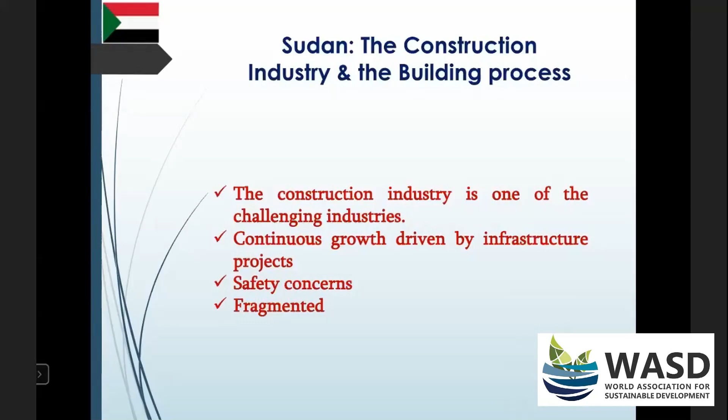Right, the construction industry in Sudan, as in many developing countries, suffers from a multitude of challenges. These challenges confront the development and the performance improvement of the industry. And the problems related to construction and building materials, their production, their supply, and their management, tend to dominate the list of impediments towards the industry improvement.

So the building construction process basically involves the usage of several materials. Some of them are natural, others are man-made. And because of the appearance of new trends in building architectural and structural designs, more man-made materials came into the scene with more sophisticated properties to match the client's requirements for more durable, cheaper, and ecologically friendly options.

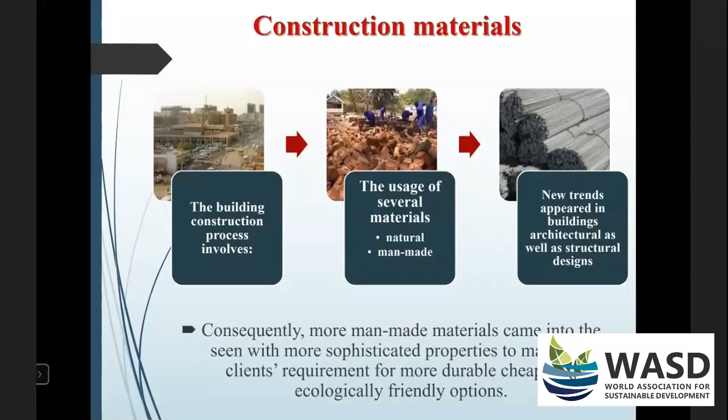Concrete is the most widely used man-made structural material. It's a composite material mainly containing aggregates in their two different forms, the fine and coarse aggregate, as well as cement and water added in different proportions, and sometimes we add some admixtures for certain properties. However, concrete is criticized for being an environmentally unfriendly material.

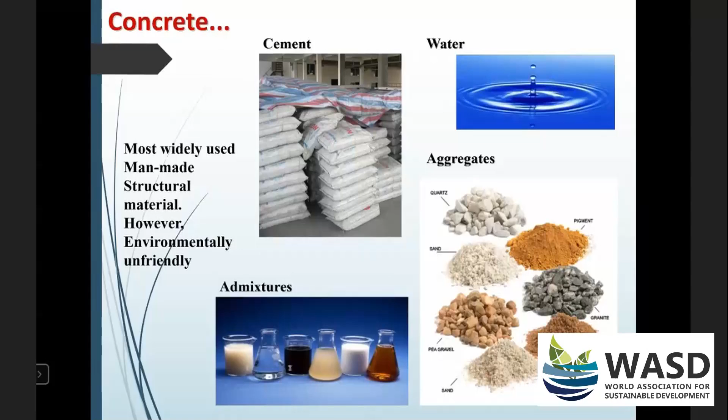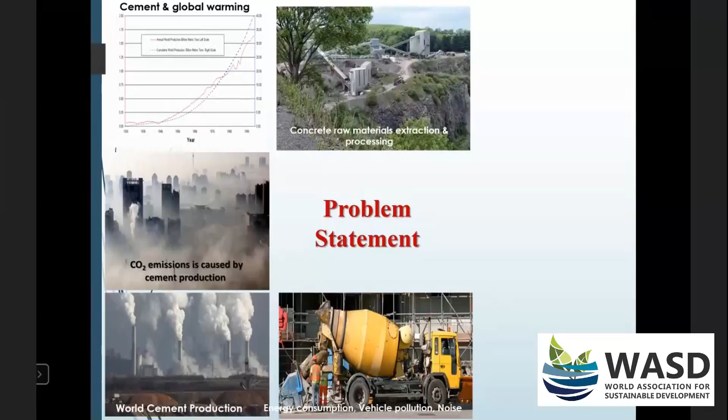The production of concrete involves the use of cement, and cement production is one of the main sources of carbon dioxide emission. The production of cement involves depletion of natural resources during the raw materials extraction and processing. And concrete transportation consumes energy and poses some pollution to the environment as well. So the impact of concrete production on the whole environment is that it destroys the natural infrastructure without replacing the ecological functions that humanity depends on.

So our aim concerning this part of our research is to find environmentally friendly materials, to look for more comparable options, something that is sustainable, but at the same time could do the same job that the components of the concrete mix can do. So we basically were thinking to go green.

Our objectives are as follows. We wanted to explore the availability of kaolinite clays as a naturally occurring mineral in Sudan, and we wanted to prepare metakaolin, which is a thermally treated form of the kaolinite clay. And we wanted to determine the chemical composition of this metakaolin and to assess its pozzolanic reactivity, because we're going to use it as a replacement for cement in different types of concrete mixtures, so that we can determine whether it's a suitable material or not.

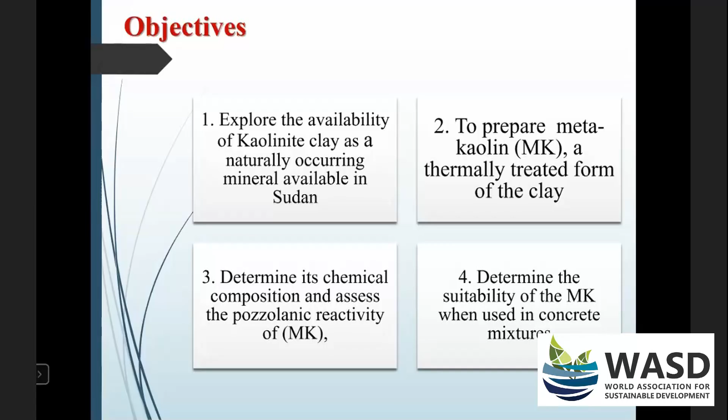So the methodology that we basically adopted was as follows. The kaolinite clay was collected from 4 different locations in Sudan for this study. After that, we transformed the kaolin clay to metakaolin through a calcination process. Then we checked the chemical composition to determine the major oxides available in this material, and compared that to ordinary Portland cement. As well, we wanted to determine the degree of pozzolanicity for this new material before using it in different ways in concrete mixtures.

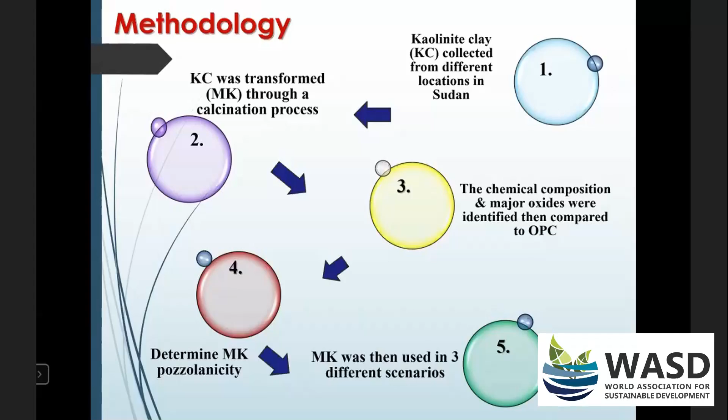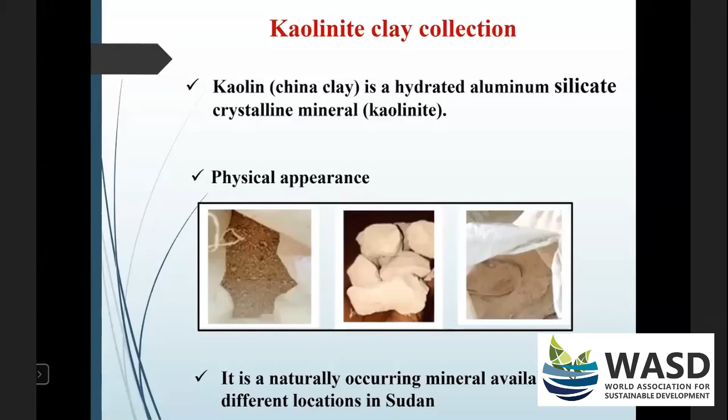As for the kaolinite clay collection, kaolin, which is the China clay, is a hydrated aluminum silicate crystalline mineral, which is referred to as kaolinite. In physical appearance, when we collected these samples from the field, sometimes it's a powder, other times it comes in larger pieces, whitish in color in some places, and in other places brownish, light brown, or maybe yellowish or grayish. All in all, it does not dissolve in water, but when it gets wet, it gets darker in color, and it gets an earthy smell.

Chemically, the kaolinite clays are structured around a series of alternating buckled silicate and aluminate layers, with the silicon in 4 coordination and the aluminum in a mixture of 5, 4, or 6 coordination.

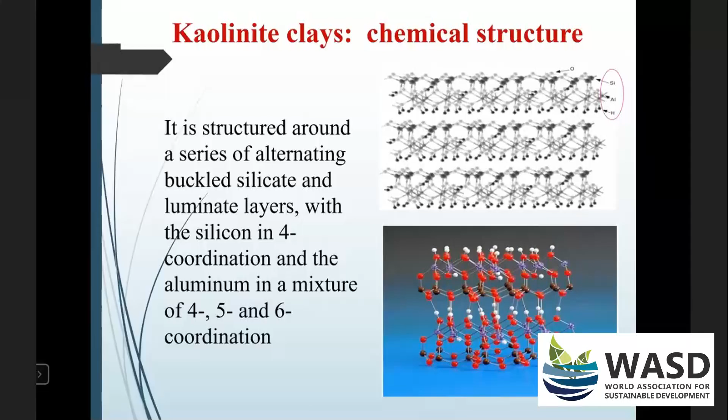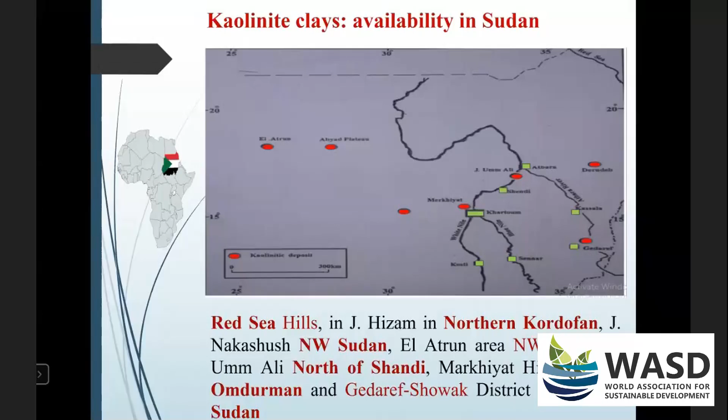In Sudan, it was found out that kaolinite clay is available in many different areas, extending all over the country. We've got samples of kaolinite clays in the Red Sea Hills in the northern Sudan. We've got some in northern Kordofan in the western part of Sudan. We've got some in the northern parts of Sudan, in Shendi, we've got in Gedaref, Showak, even in the central parts of Sudan. So it's available in many locations in Sudan.

The process of getting the metakaolin, which is the material that we are going to incorporate in our concrete mixtures, we had to treat the kaolinite clay in a thermal way. So it's a very simple and basic process where the mineral kaolinite was heated. Upon heating, this process drives the water out and collapses the material structure. The ending result is an amorphous aluminosilicate, which is the metakaolin that we are trying to use in our concrete mixtures.

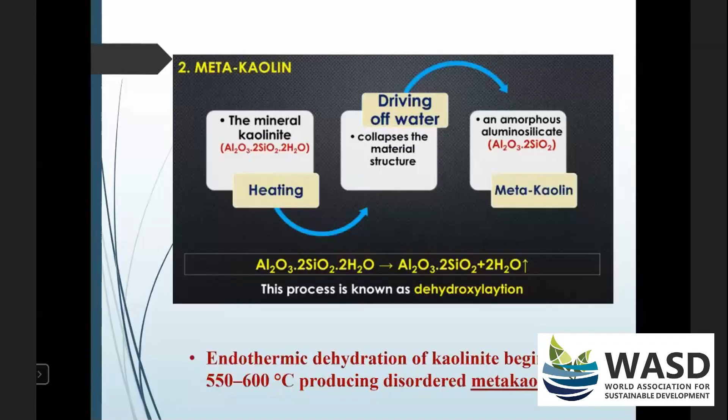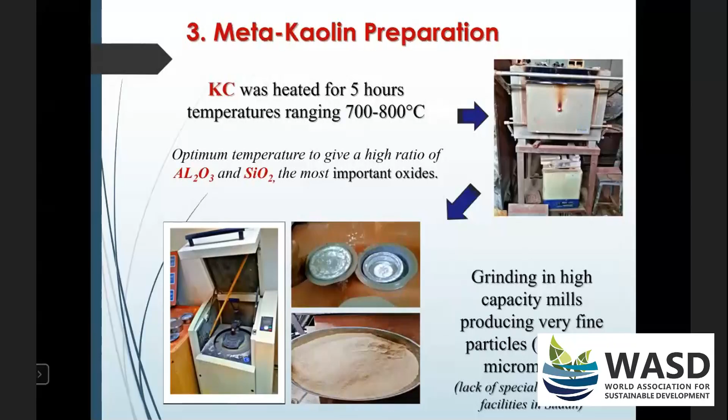For us in the lab, the kaolinite clays were heated for 5 hours in temperatures ranging from 700 to 800 degrees Celsius in a very simple furnace in the lab. And after that, the process was followed by grinding it in high capacity mills to produce very fine particles, because basically we are trying to mimic the fineness of cement in our concrete mixtures.

As for the obtained sample of the metakaolin, we had to check the chemical composition of the material by determining the oxides present in our samples. So we were focusing on the major oxides because we're trying to compare that to ordinary Portland cement. So the samples obtained from 4 different locations, Merowe, Kassala, Garre, Alsayal in Sudan, we had the analysis, and then that was compared to the major oxides considering 3 different standards: the Sudanese manufacturers, the limits according to the ASTM, as well as the limits according to the British standard.

On top of this, we had to check the pozzolanicity against the limit set by the ASTM C618. So what we found out is that the kaolinite clays are very rich in oxides that are of interest to us when we study cement.

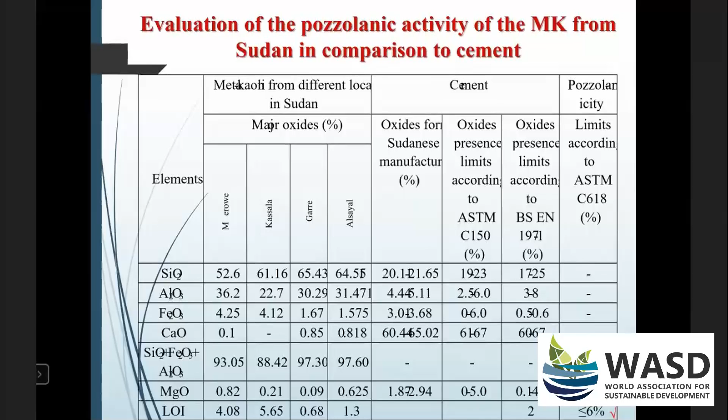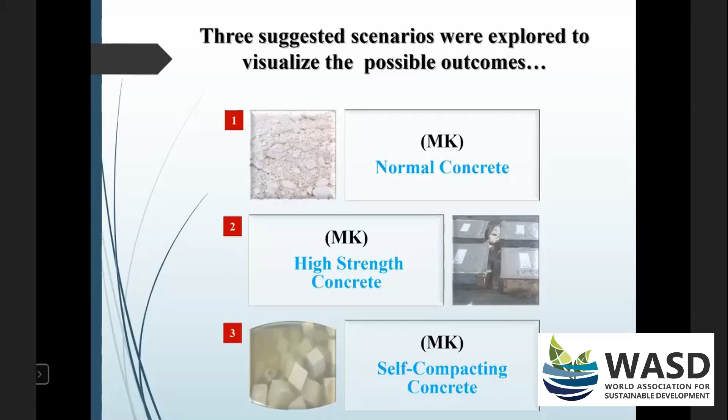So after checking the suitability of the calcined kaolinite clay in comparison to ordinary Portland cement, we wanted to use that in our concrete mixture. So 3 suggested scenarios were explored to visualize the possible outcomes. We had the metakaolin to produce normal concrete, high strength concrete, and then self-compacting concrete. So with the first scenario, the metakaolin was added in concrete mixtures in different percentages. We started with 5, and then topping it up to 10, 15, 20, and 30% in replacement for cement.

And we checked after that the compressive strength for the different samples in different curing ages. As for the first sample, we had it for 7 days, 28 days, and we even studied the long-term effect of this material in our mix. And we were able to get results exceeding the targeted strength for the first sample.

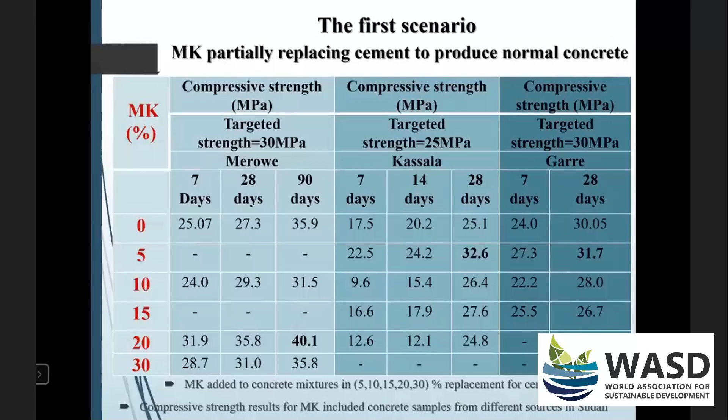As for the second sample, or the first design, we had 7, 14, and 28 days, and we were also able to get compressive strength matching or even higher than the targeted strength. The same applied for the last sample from another location, and it gave us the same results.

For the third scenario, incorporating metakaolin to partially replace cement to produce self-compacting concrete, three mix trials were conducted, where the first trial was not successful, and for the second and third trials, we were able to get self-compacting concrete. We had the fresh concrete tests for the slump flow, the V-funnel test, and the viscosity test, and for the hardened concrete properties, we checked the compressive strength.

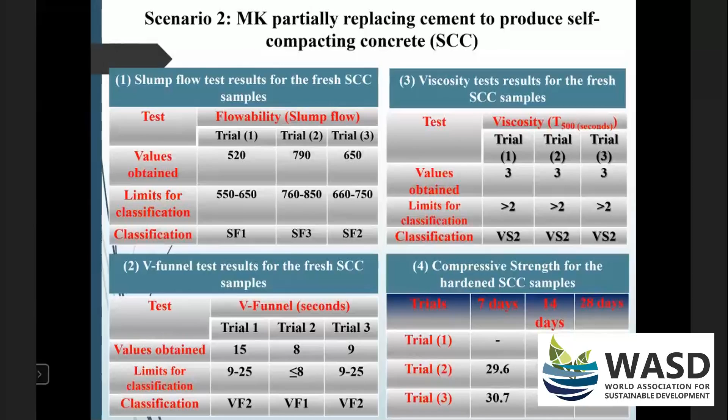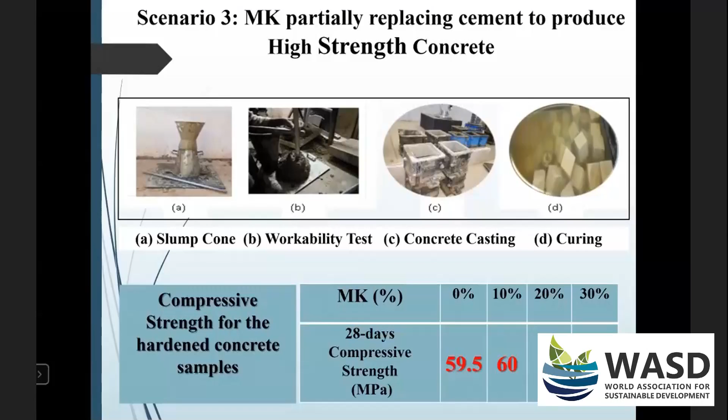So for the third scenario, we had the metakaolin partially replacing cement, but this time producing high-strength concrete. So we had all the fresh concrete tests as well as the hardened concrete tests. For the fresh concrete tests, the results were within the required set limits, and for the hardened concrete samples, we were able to get compressive strength in the range of 53 to 63 megapascal, exceeding even the targeted strength.

So what can we say out of all this experimental work and these experimental results? The kaolinite clays are abundant, and they are present in different locations in Sudan, and that makes it one of the most important aspects. The other thing is that the chemical characterization of the metakaolin showed us the presence of high amounts of silica, alumina, and iron oxides. The percentages are even exceeding the limits set for cement by the 3 standards that we consulted.

And these are the major oxides that we are looking for. At this point, we were very happy with these amounts, and we were expecting good results, as these are early indications for the suitability of this material. Also, we found out that the presence of magnesium oxide and the loss on ignition values were all within the set limits for all the consulted standards.

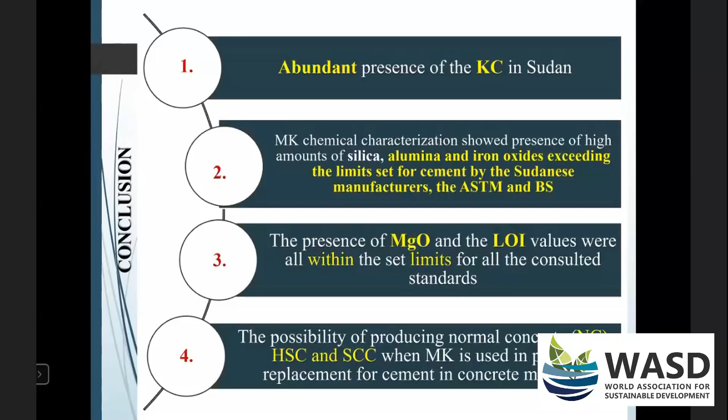It was also evident the possibility of producing normal concrete, high-strength concrete, and self-compacting concrete. The 3 scenarios that we investigated, we were able to get good results out of the use of the metakaolin. We found out that the location from which we got the source kaolinite clay makes a difference. For example, Kassal's metakaolin yielded the targeted strength in 28 days, with an optimum amount of only 5% of metakaolin replacing cement, while from another location, which is Garri, the metakaolin yielded just slightly higher than the targeted strength, with the same amount of metakaolin replacing cement.

And when we had the metakaolin included in self-compacting mixtures, that was interesting. All the slump flow test results confirmed the suitability for the different types of structures, being slightly reinforced, for vertical application or normal application, while the other test, which is the viscosity measurement, showed a medium rate flow, whereas the 28 days compressive strength further confirmed that the trial mixtures meet the targeted value.

It was also possible to achieve high strength values for the concrete that included metakaolin, and we got up to 63 megapascal when metakaolin was included in the range of 10 to 20% in replacement for cement.

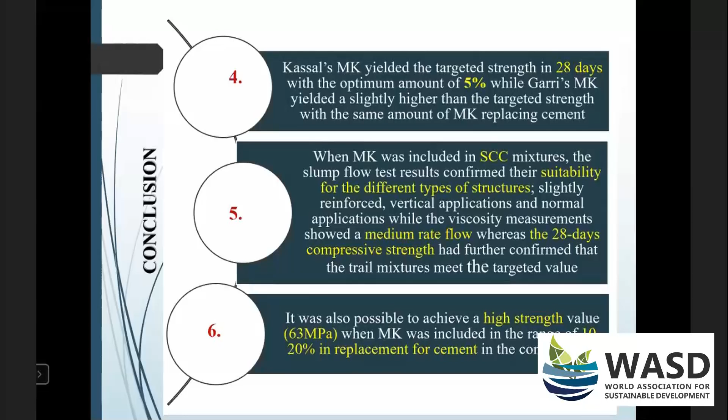So what can we say out of our results or our experimental work? Because we had so many samples, different ages, different metakaolin from different locations. We had the metakaolin processed at different temperatures. So we had a lot of experimental work, and all these results gave us reasonable evidence for the usefulness of this material to be a sustainable cementitious material, because on one hand, it gives us the required properties that we

need in our concrete. And at the same time, it's available, abundant, it doesn't really need chemical treatment or processing, and it does not deplete the environment. So we're not harming the environment. We are getting what we want for the concrete that we are producing. So we were quite happy with this material to be used for concrete

as a cementitious material. And I think we've still got more and more experimental work on it, to have it in more types of concrete and studying it at longer ages. But the results until this point gave us very reasonable evidence that this could be one of the sustainable construction materials. Thank you very much for your attention.

Thank you very much, Dr. Salma. Now let's open it for question and answer. Because I've been following this on the social media. By the way, there's very good coverage in the social media. Now, Dr. Salma, let me just unmute you first to make sure. Can you unmute yourself? Yes.